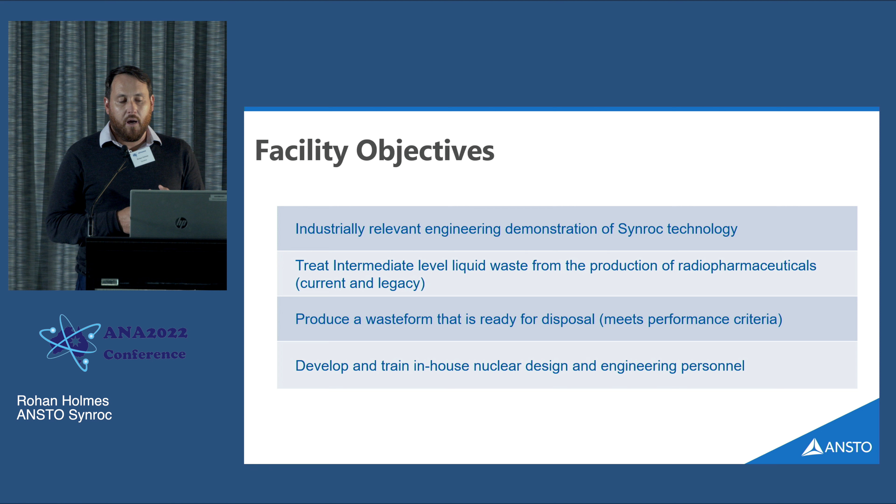Another exciting and important part of the project is that ANSTO is the design authority on this project. We're responsible for all of the engineering, so we're developing a good team around the technology for engineering implementation. On that note, I just thought I'd put this slide up here.

Starting out, looking at where we started - the process itself of making the Moly-99, we have target plates that are irradiated in OPAL. Those plates are taken to the ANM facility where the Moly-99 is extracted, and some waste streams come from that.

We're particularly interested in the waste stream that comes from the dissolution process, which is mainly sodium and aluminium with a lot of fission product. The main fission product of interest is really Cesium-137. So that gives you an idea of the material we're dealing with.

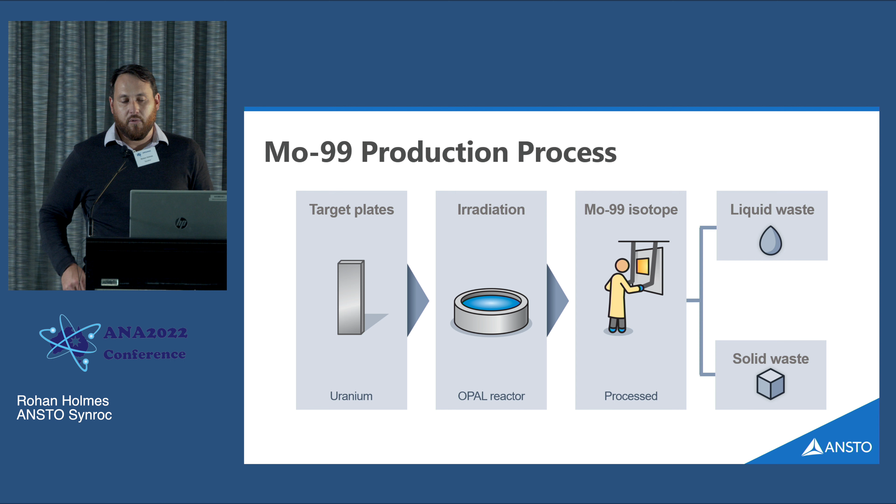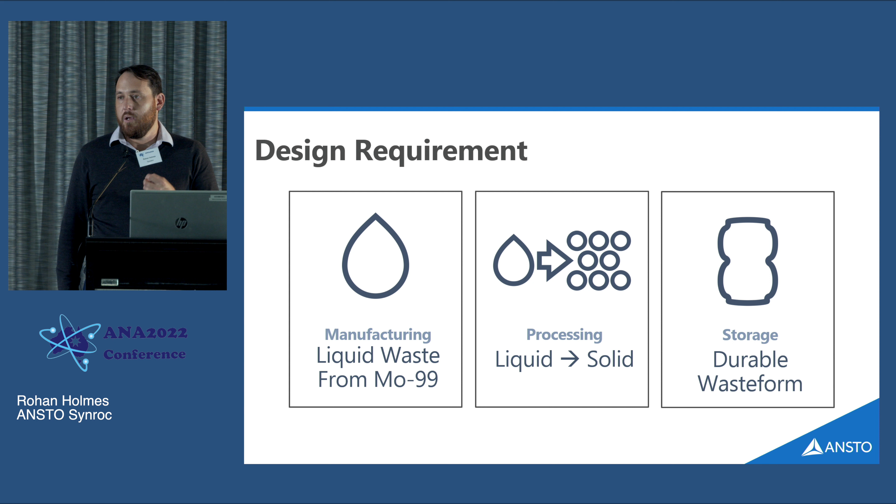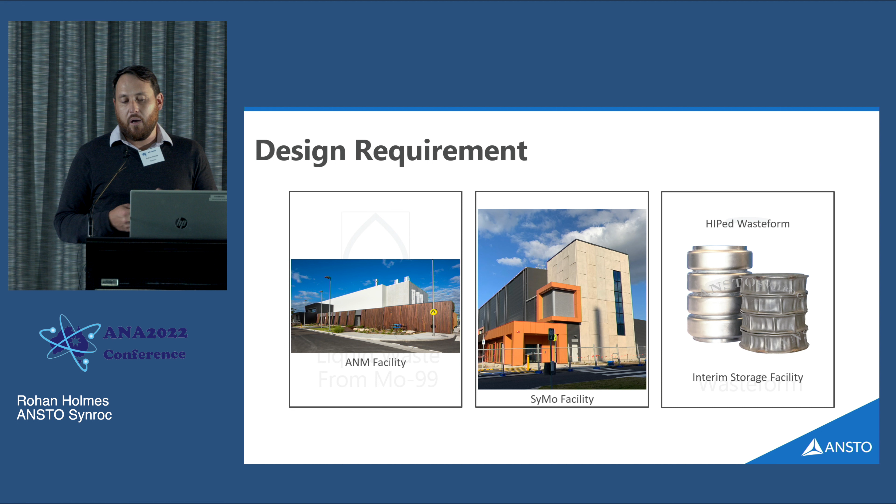So what do we need to do? We need to take that liquid waste and somehow transform it into a solid material, a solid, durable waste form. That's what the process is designed around. You can see we have our facility in the middle there, which is progressing reasonably well.

In terms of design basis for the facility, we're looking at treating about 6,500 litres of waste per year. That's a mixture of current production waste, but also some of the legacy wastes on site that also need to be disposed of or made safe.

We need to make a waste form that's acceptable to go into some sort of long-term storage, interim storage, or disposal facility. It's a bit of a challenge because some of the requirements around that material are a little unknown, but we have a high-performing material. We benchmark our materials against international standards for things like glasses, and we're well within those ranges for leachability testing. So we're very confident that material will be disposable.

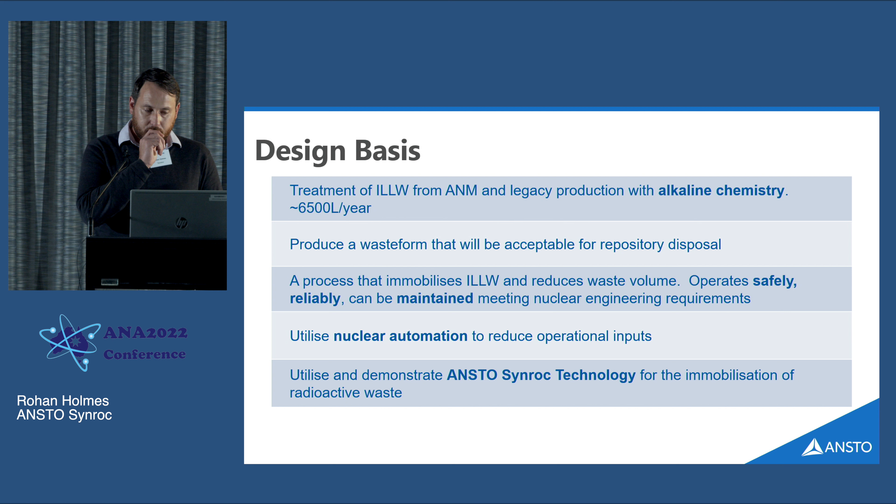A key driver is designing a facility that's safe, reliable, and maintainable. That's one of the big challenges with this project - doing the design work to ensure we can not only operate the facility, but maintain and keep it operating. We use nuclear automation where possible, and there's a fairly substantial degree of automation in the process that we'll look at later on.

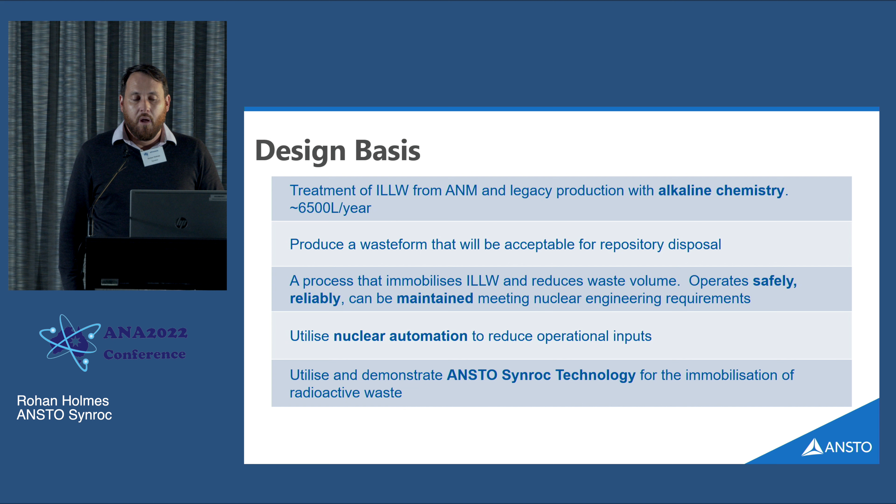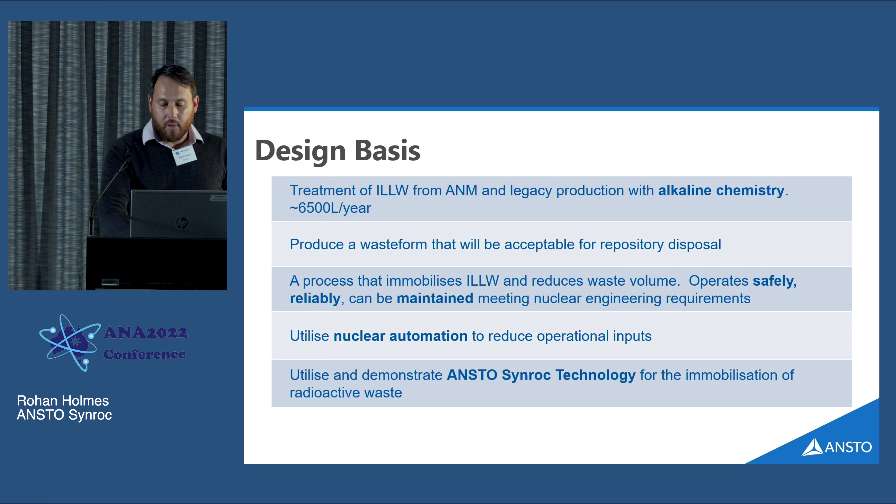Automation's relatively easy. What makes it hard is when you're trying to do it in a nuclear environment - some of the easy wins you have with other types of automation aren't available to you in that environment. So a little bit of history, a little bit of background on Synroc - it's been around a long time.

There's a pretty substantial body of knowledge and literature developed around that material, and the materials are all different types of waste forms. The research and development's really been driven into the waste form science. There's a history of developing waste forms for challenging wastes, looking at things like reprocessed fuel waste or some of the plutonium or actinide materials. But we have a pretty broad range of waste forms available to us.

One of the key things is ensuring we have the required data and models to demonstrate the waste form performance for that final disposition of the material, and that's another key aspect of the work we do.

SyMo is one of our biggest projects, but we still have a lot of other engagements around the world that are also ongoing, with the UK in plutonium disposition. We just finished our first major report for Terrestrial Energy in Canada, looking at the feasibility of the Synroc technology for wastes arising from their reactor designs.

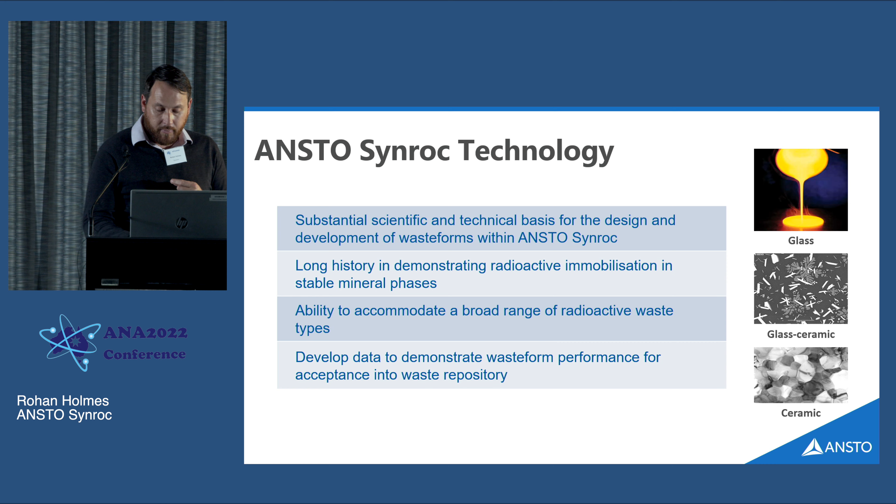So we submitted that report just before Christmas, and it was fairly well received by Terrestrial Energy. So what's the advantage of Synroc, or why Synroc? Number one, it's durability of the waste form. For this particular application, dealing with the moly wastes, we actually get a volume reduction as well. So if we had 5 cubic metres coming in, we'll probably have 2.5 or 2.6 cubic metres of waste form produced. So it's a durable waste form with the required performance characteristics, which demonstrates the advantage of the process.

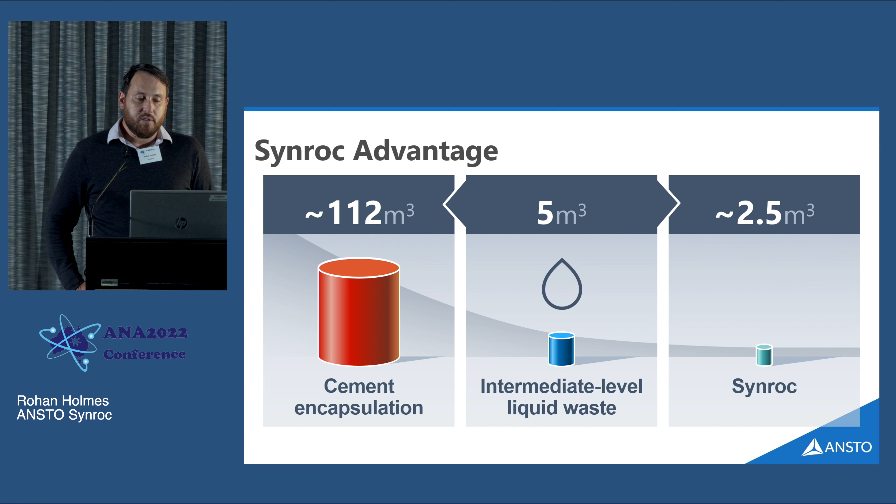Other technologies are available, but they have their own challenges and limitations.

Stepping back and thinking about the process itself, this is a very simplified overview of how it operates. We take the liquid waste, we add our waste forming additives to it, which give the waste form the right chemistry and composition. We process that material into a powder through evaporation and calcination. We dispense that into a HIP canister, then evacuate and seal that canister and hot isostatically press that material. The hot isostatic press allows you to put pressure on the can, so you get the collapse of the can and the formation of the required waste form.

It's a substantial advantage using this process because all your high temperature processing steps take place in the can itself. So some of the challenges you might have from other technologies with volatilization of radionuclides are much less of a problem with this technology. Your supporting services and systems such as off-gases become much more manageable and simple compared with, say, a vitrification plant or other plants.

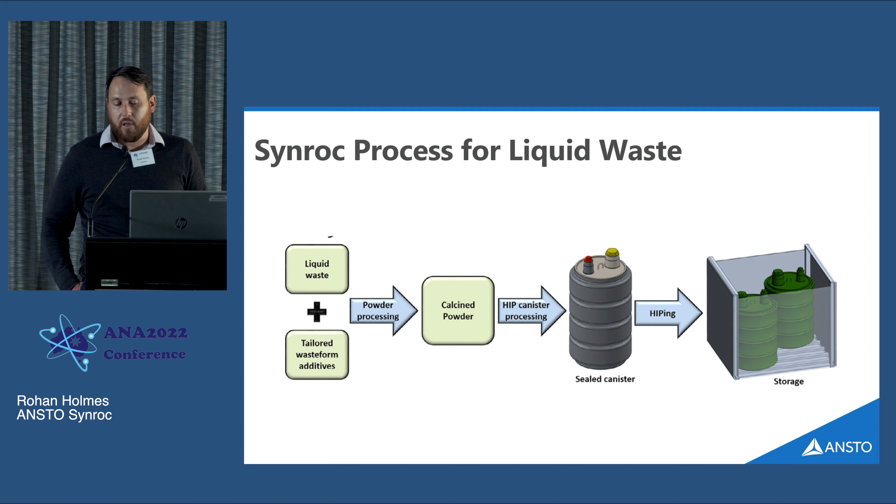So we had some pretty good waste form technology, a bit of an idea of how to process that into a waste form of value. What we really had to get in and do and apply effort to was the technology and engineering development for that, to turn it into an actual, real industrial process.

When I started the project, we were probably sitting in that 3 to 4 TRL range. Everything we've been doing since then has been driving up that maturation pathway, we want to get out to the 9. That takes us a long time, that's operations. But we'll step through some of the work that we've done to get to where we are now.

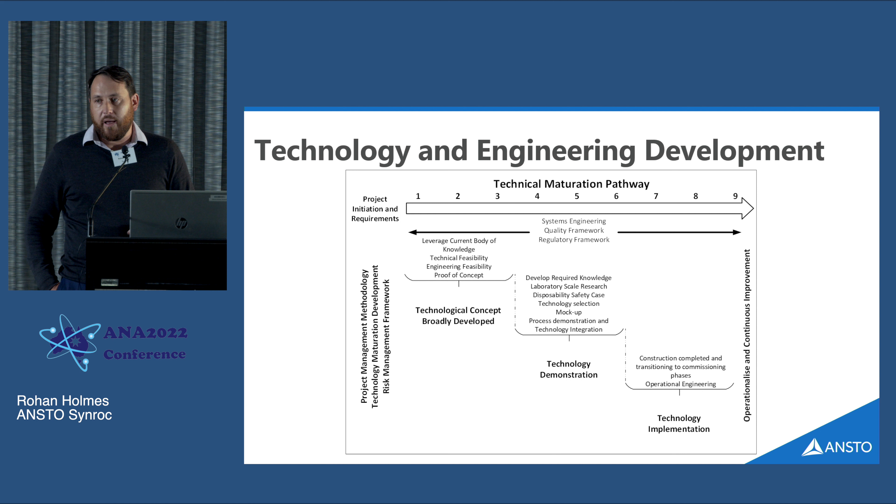We're pushing that 6 or 7 level at the moment with what we're doing. Once we get the facility, the process installed within the facility and get into the commissioning phases, we're starting to push up that scale again.

One of the key pieces of infrastructure that we developed as part of this work - and it's quite nice that Adie's here because he's been a strong supporter of the project and supported even the implementation of the demonstration plant - we built an inactive demonstration facility. This was to basically demonstrate the process technology, understand how to integrate it, and then how to operate the process itself. This is all part of driving that technical maturity up.

The equipment you see in the facility is the same as what you would see in the final facility. Now, we've only focused on certain parts of the process - the parts that had the biggest risk profiles. So what you see there is a lot of the powder production system, which was early on one of the most challenging and problematic parts of the design.

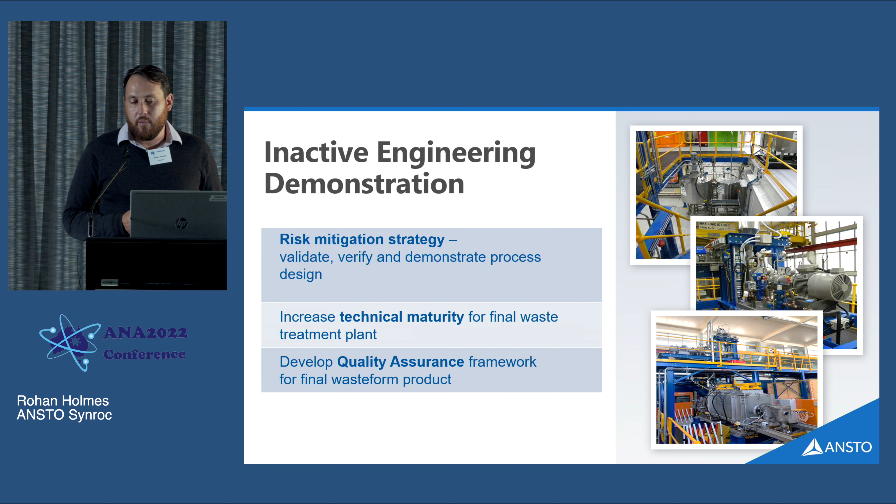So just a little bit of an overview of some of the things we've been looking at: process integration, validating our process chemistry, our process mass and energy balance, but also how do we decontaminate and clean this facility. We don't want to generate secondary wastes, so any liquid we use to decontaminate or clean the process needs to go back in and go into a waste form. So in that facility, we've used that to design a lot of the processing, or the process design, but also the operational parameters for that piece of technology.

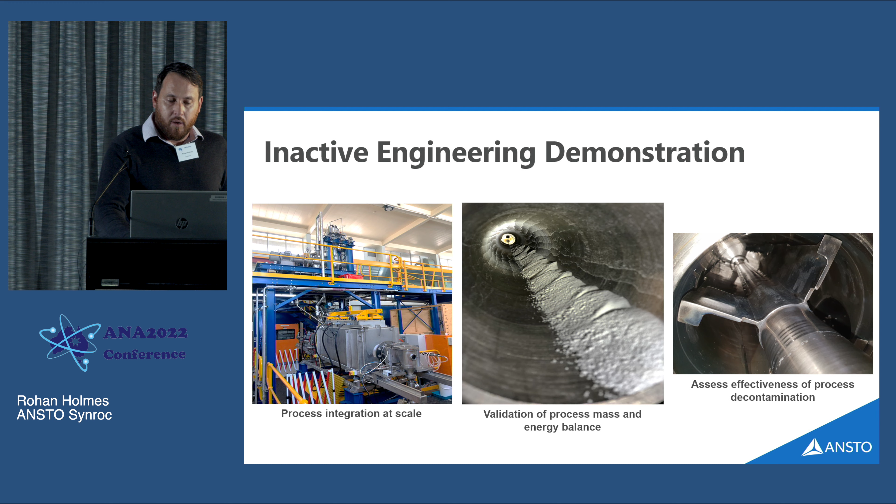Spoke earlier about the hot isostatic press. Hot isostatic pressing is something that we've been doing at ANSTO for 30, 35 years. But what we need to do is get to a waste form with certain properties. And that's what you see on the very right there - that's what a full cycle in the HIP, what the material would look like.

The experiment here is to look at, well, what happens if we interrupt the HIP cycle? Because what we want to know is, well, how does our chemistry behave? How does our phase formation occur? But also, what mechanistically is happening as the can is being deformed and pressed?

What this nicely illustrates is you can see there's a clear transition between 850 and 950 degrees Celsius here, where we don't have any material forming on the surface. So that's when we've got a nice durable waste form. Below that, you can see some phosphate coming out of the material, so we've got leachability in the material. We just haven't quite got the material properties we require by that point.

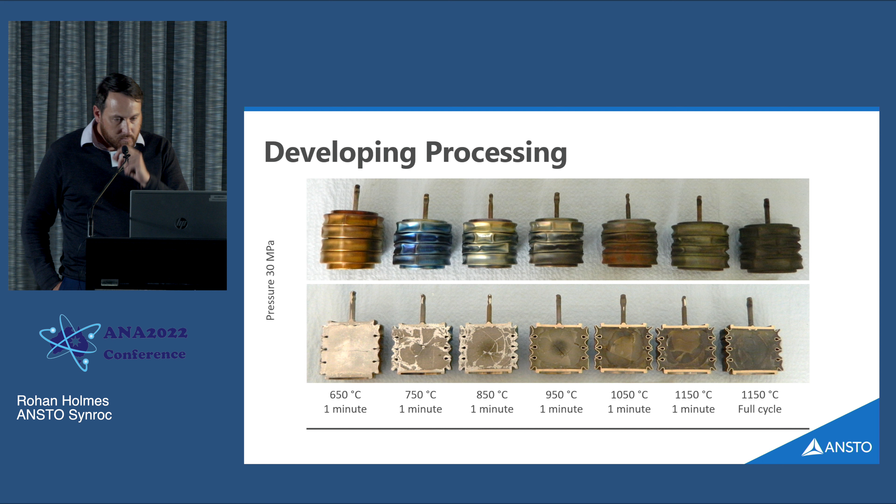This also feeds into our safety cases. By knowing what's happening at every point in the profile, we can design how the HIP profile works. The HIP's installed within a hot cell, so that we know what the failure mechanism is at the different points in the HIP cycle and what we need to protect against in each of those points. So it's a very neat and simple illustrative bit of work that we've done there.

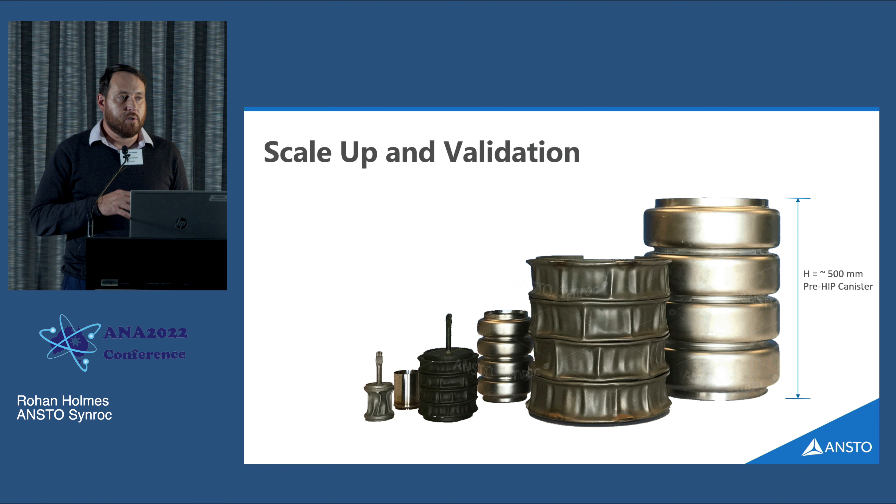So the facility itself, jumping away from some of the development work and moving into the actual facility, I guess the point I'll make here is we've had handover of the building from the builder, and it's been handed over to the project now. So we've moved from a construction of the building phase into a process installation phase.

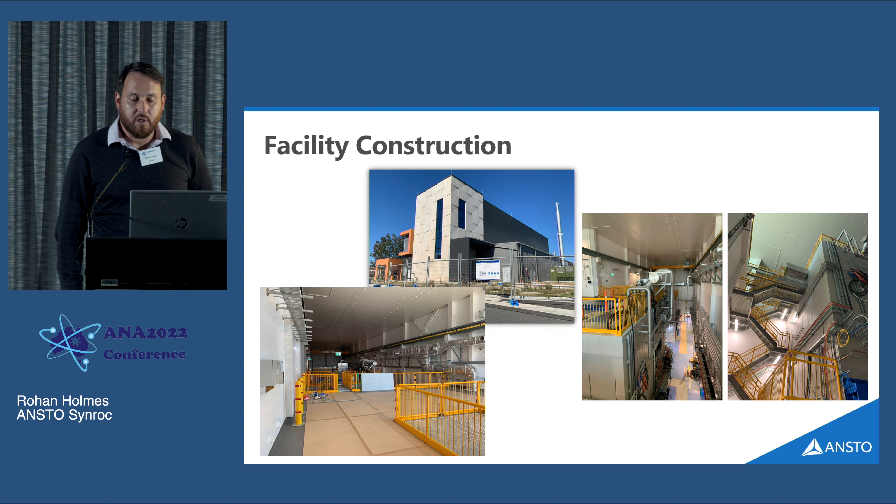We have a number of the liquid systems installed in the facility, so where our additives come in, where our cleaning solutions come in, where our waste comes in. And we also have our off-gas plant fairly well complete, waiting for us to connect up to.

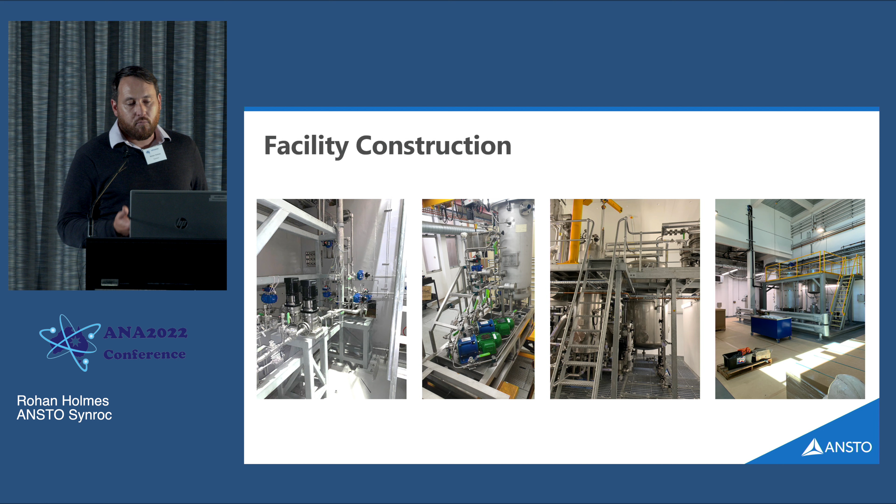But we have a lot of other systems that have been built outside the facility that are ready for install. The way we've approached it is to build modules or units, finish those modules and units outside or in workshops, and then integrate and bring those into the facility. So we're making reasonable progress towards having stuff installed, and a lot of the other equipment might be approaching that being ready for installation.

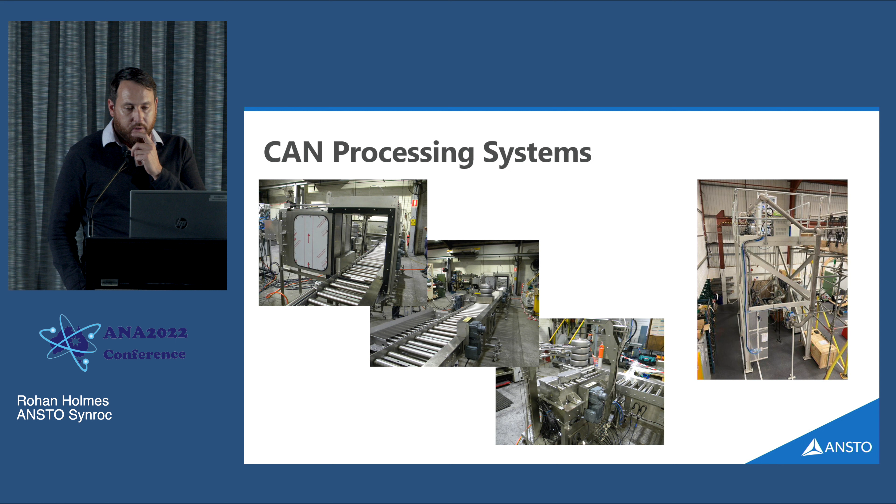The HIP system itself, the HIP is a very large and impressive piece of equipment. Quintus from Sweden have supplied the hot isostatic press. To give you an idea, the height of the press is about 6.5 metres. This is really the first industrial large-scale implementation of a HIP in a hot cell in the world. There's been small research HIPs in hot cells previously, but they're really babies by any comparison.

So that machine's at ANSTO at the moment. The hot cell's being prepared for it to be installed. The full-blown installation of that will be starting after the start of the new financial year, so Quintus will be coming out from Sweden and will be working with us to install that machine. They could be here for 2 or 3 months with us getting that machine installed.

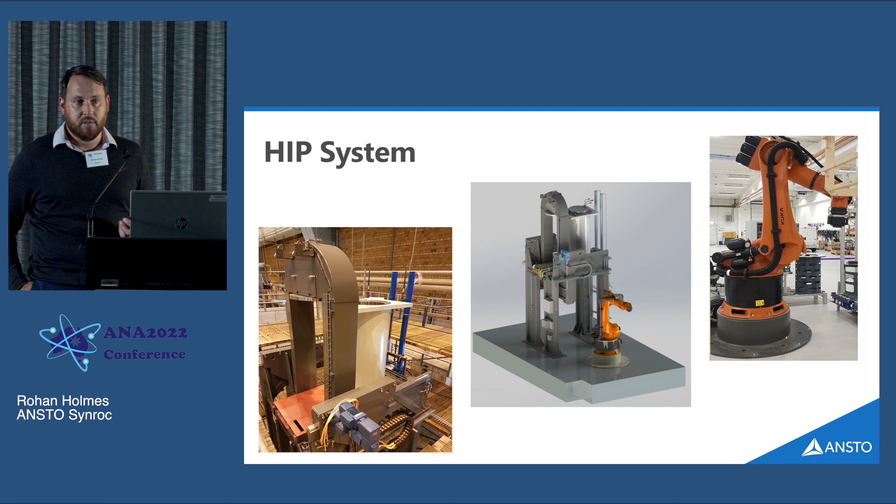I'm going to just make a jump back to talking about automation and some of the nuclear automation that we've been working with. This probably demonstrates a lot of the value of the demonstration plant. We use that facility to develop the architecture for the control system of SyMo. We developed it, we tested it, we've written all the software manuals, a lot of the code, the blocks ourselves.

We've tested it in that facility, we understand how it works. There's a clear focus on safety, how the process behaves, making sure the process always trips to a safe state for maintenance, and that's been one of the philosophies of how we've designed this. But we're responsible for the design, delivery and integration of that.

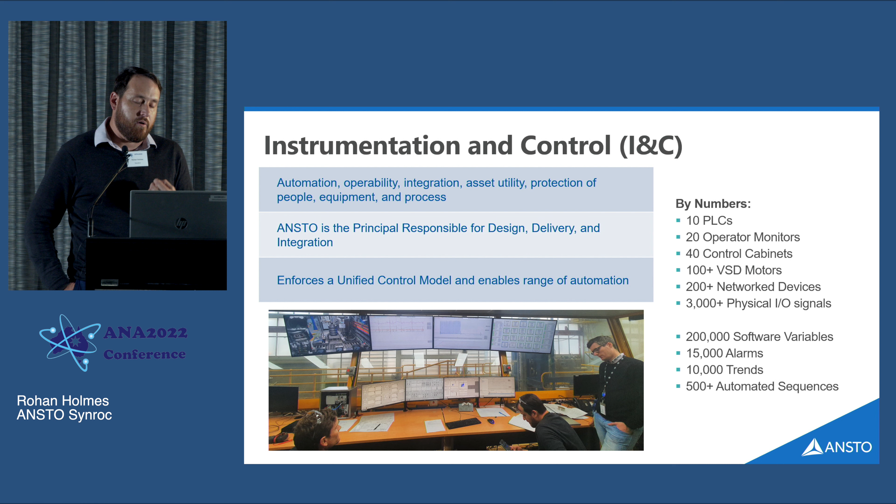So I guess just to give a little bit of a closeout on where we are on the facility: as I said earlier, we've had that handover of the building to us. We're now getting into that installation phase, we're moving ahead with that. It's been a slow start, but we're really building on that. The middle part of this year is going to be incredibly hectic.

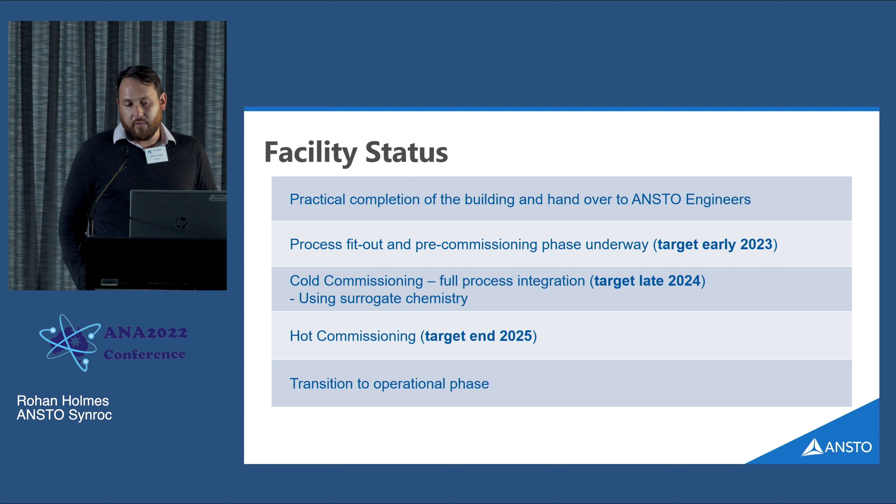We'll move into cold commissioning later, sort of in 2024, and then the target on hot commissioning is in 2025. And most importantly, then moving into that transition to a full operational, reliable facility, which happens after that.